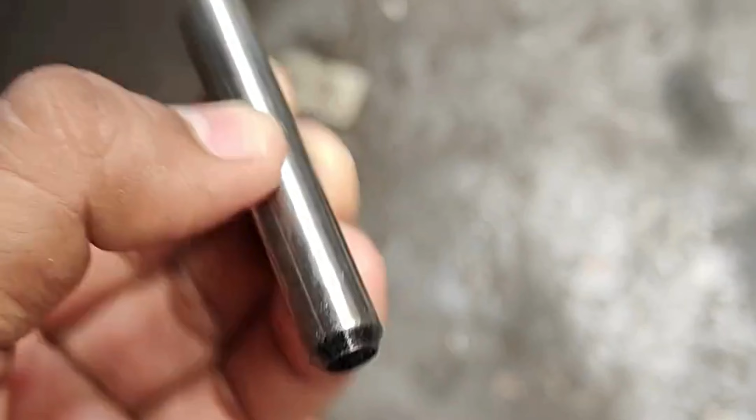Today we're talking about a very small but extremely important mechanical component, the dowel pin. If you work with machines, engines, jigs, or fixtures, you've definitely seen this little guy. But what exactly does it do? Let's find out. A dowel pin is a solid cylindrical rod used to align, position, or hold machine parts together. Even though it looks simple, the precision of a dowel pin is what makes it so important in engineering.

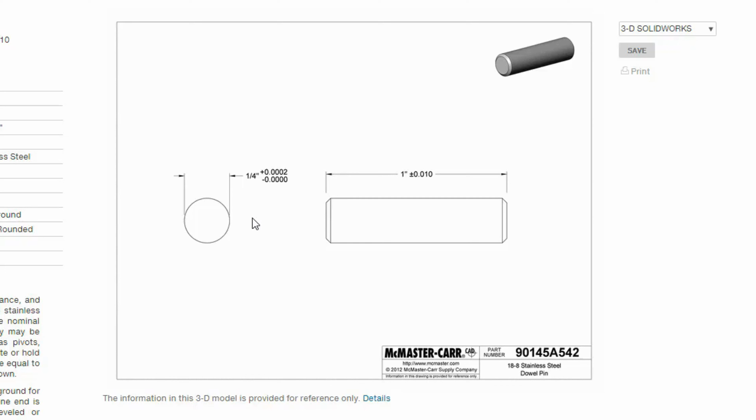Why are dowel pins used? Dowel pins maintain accurate alignment between two components. Whenever you need exact positioning, repeatable assembly, or vibration-free stability, a dowel pin is the perfect solution.

There are several types of dowel pins. Solid dowel pins are the most common and high precision. Spring dowel or roll pins have a slit and are used where slight flexibility is needed. Tapered dowel pins are used for self-centering applications. Grooved dowel pins provide extra grip in soft materials.

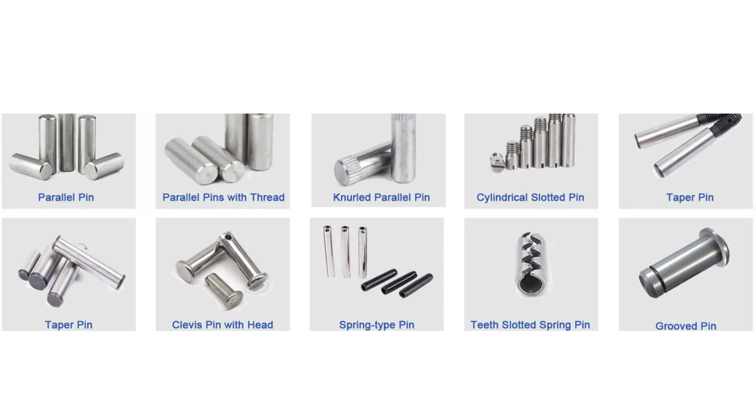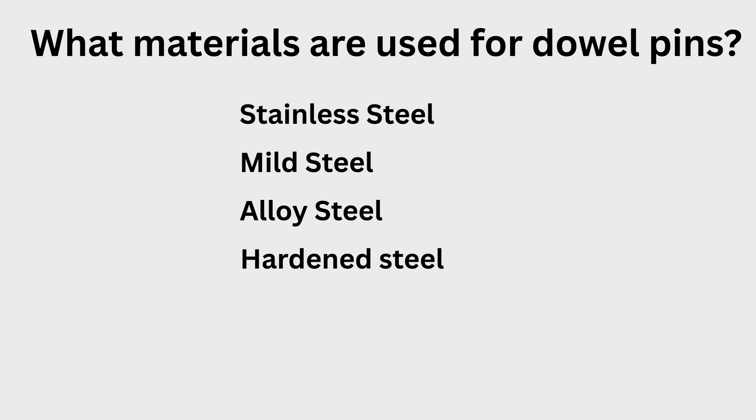Dowel pins are usually made from stainless steel, mild steel, alloy steel, or hardened steel. The material depends on where the pin is used, high stress, corrosion-prone, or precision environments.

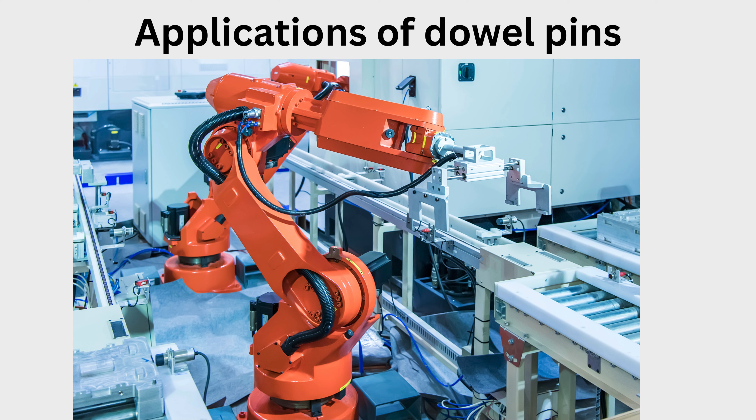Where are dowel pins used? You'll find dowel pins in automotive engines, gearboxes, machine fixtures, robotic assemblies, molds and dies, and woodworking joints. Anywhere alignment matters, dowel pins are there.

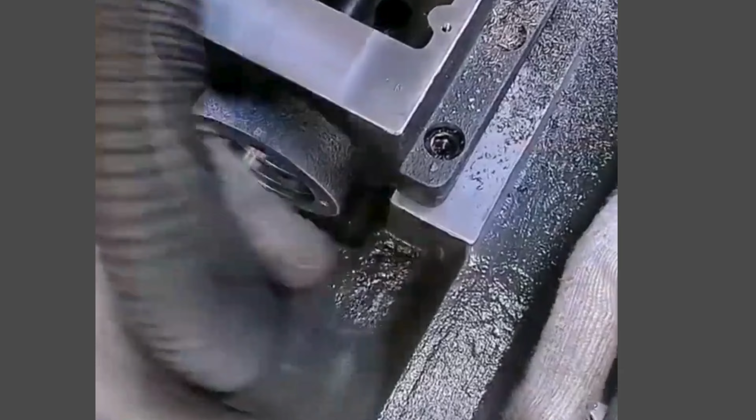How do dowel pins work? A hole is drilled and reamed precisely in the parts to be aligned. The dowel pin is then inserted into one part and fits tightly into the matching hole of the second part. This ensures perfect alignment every time the parts are assembled.

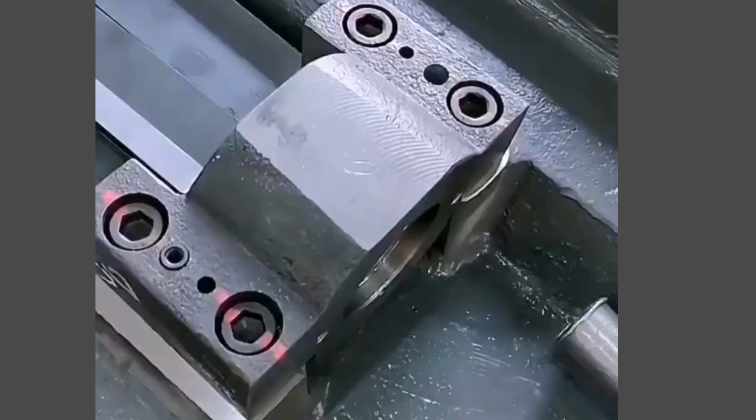So that's everything about dowel pins, small components with a big role in precision engineering.